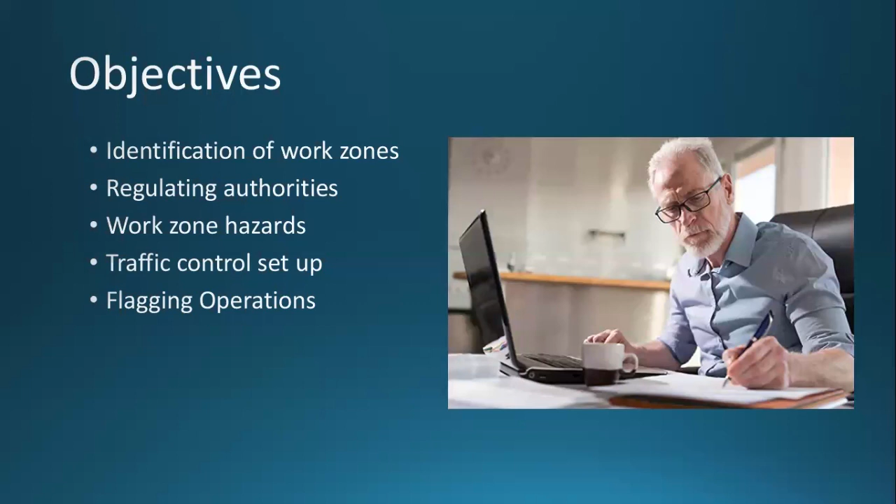The objectives of this course are to learn what a work zone is and how to identify one, to learn which regulating authorities provide standards and practices for work zone activities, as well as identifying some of the applicable standards, to learn some of the hazards associated with work zone activities and some recent statistics on work zone related incidents, to learn some of the basic operations of a temporary traffic control plan and how a work zone is set up, and to learn some of the operations around flagging, such as when it is used and what qualifications are required.

So what is a work zone? A work zone is defined as a temporary work site for maintenance of highways, road, and streets. Often work zones use cones, barrels, or barriers to guide traffic outside of the work site, such as what you would see on a major highway, but this is not always the case. Operations such as mowing, pothole repair, pavement striping, and snow plowing can use methods such as warning signs, shadow vehicles, and flashing lights.

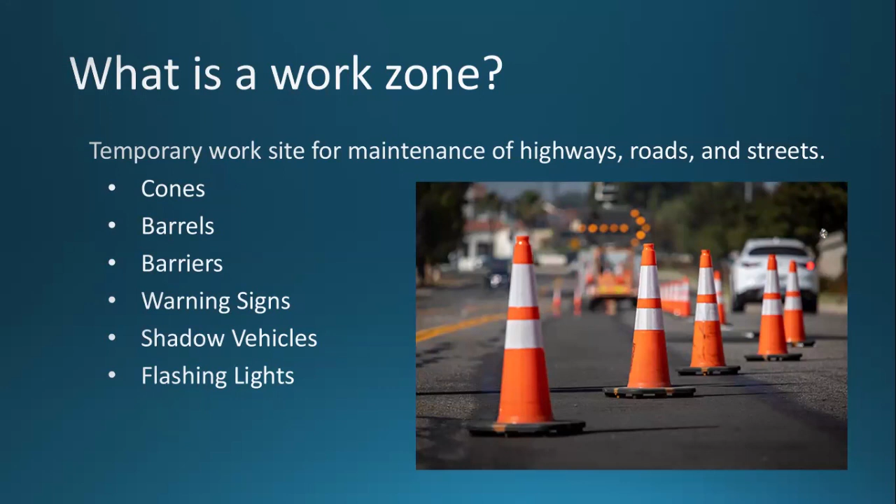The regulating authorities for work zones include the Occupational Safety and Health Administration and the Federal Highway Administration. The Federal Highway Administration created the Manual on Uniform Traffic Control Devices, MUTCD, which contains the national standards governing all traffic control devices.

Additional standards such as Kentucky Administrative Regulations and the Kentucky Revised Statutes are specific to Kentucky. Other standards incorporated by reference by OSHA include the American National Standards Institute, National Fire Protection Association, and the International Association of Fire Chiefs.

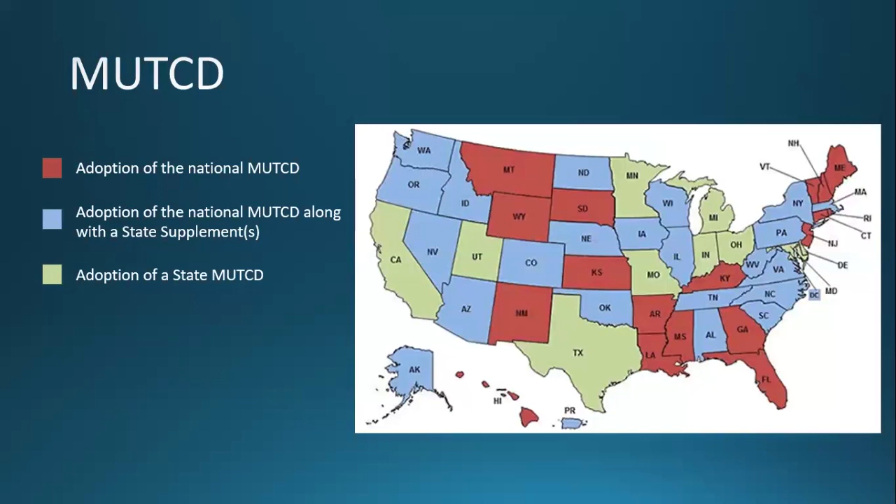Within the MUTCD, it is important to understand the format of the text. If the text mentions the word shall and is in bolded text, that section of the manual is a standard and is mandatory by law.

If it uses the word should and is italicized, then it is not required by law, but is strongly recommended. If the word may is used in regular text, then that section is providing information of an optional alternative. Lastly, everything listed in regular text not using the word may is additional information or supporting text.

The Occupational Safety and Health Administration covers very little on work zones. The MUTCD is referenced by OSHA in 29 CFR 1926 Subpart G, signs, signals, and barricades. It is also incorporated by reference within 29 CFR 1926.6.

The standards in this subpart cover the general requirements for accident prevention signs and tags, and the general requirements for flaggers or signal personnel. OSHA standards are not very specific on work zone requirements. Therefore, the MUTCD should be the primary resource used when determining regulations.

Other than the MUTCD and OSHA, there are Kentucky Revised Statutes and Kentucky Administrative Regulations, which are two bodies of state laws. Included in these are regulations that influence work zones, such as double fine areas, right-of-way to emergency vehicles and workers in a work zone, and others that help enforce driving cautiously through work zone areas. Further information can be accessed online through the state's database.

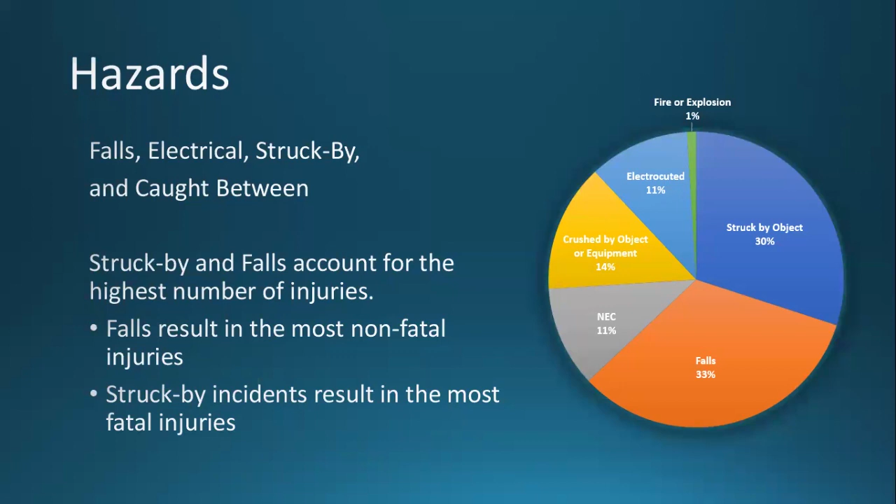Workers such as emergency responders, cleanup, utility, demolition, construction, and others in areas with moving vehicles and traffic are exposed to being struck by moving vehicles. Again, struck by incidents account for the highest number of work zone fatalities.

Moving construction equipment backing into workers, the public driving personal cars into someone, and falling objects are some of the most common struck by incidents. Common causes include confusing work zones, low visibility and poor weather conditions, lack of necessary signage, lack of warning time, and lack of proper training.

Proper training is the most important topic to prevent work zone related incidents.

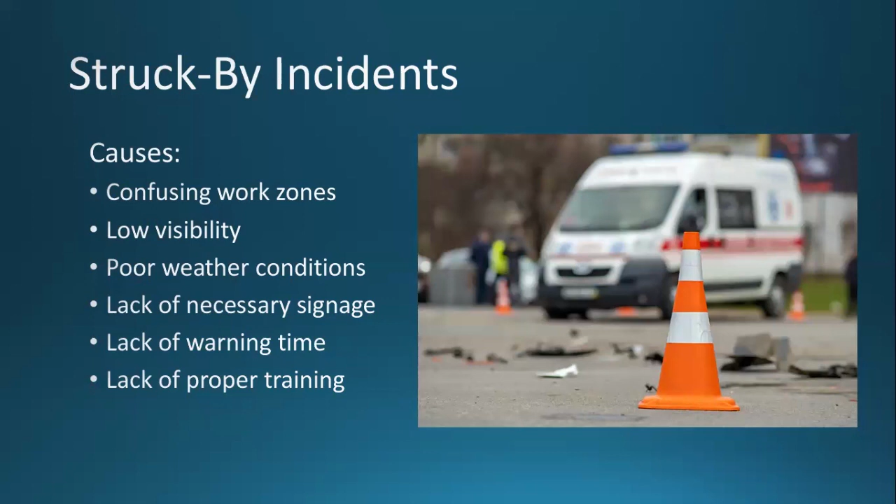Before work zone activities begin, these questions should be considered. Have you notified emergency service providers and public safety agencies? Have you determined how it will affect day-to-day activities? Have you determined how it will affect any civil events? Have you determined how it will affect school activities? Has public information been sent out regarding the upcoming road work? Have you reviewed crash history in the area? And lastly, have you surveyed the area to determine a best plan of action?

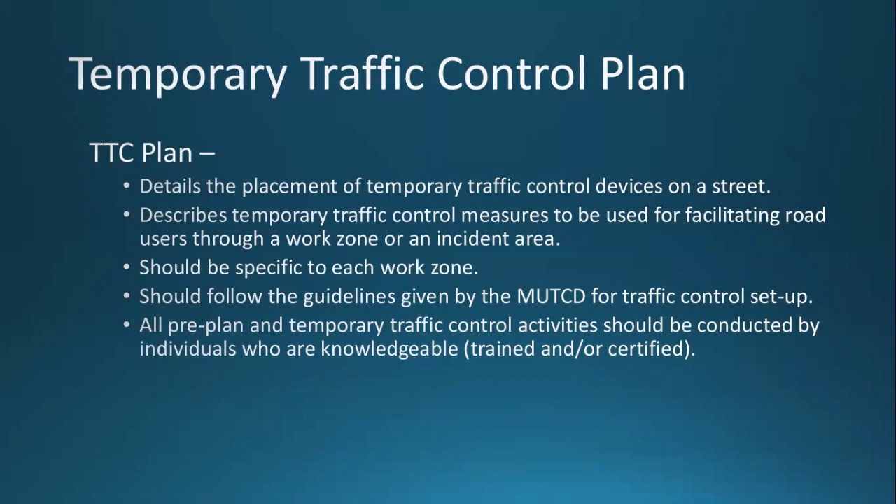After conducting the pre-plan activities, a temporary traffic control plan should be developed. A temporary traffic control plan is a document that details the placement of temporary traffic control devices on a street. These devices include signs, cones, barricades, temporary barriers, crash cushions, traffic drums, flashing arrow signs, electronic message signs, and more. The plan describes temporary traffic control measures to be used for facilitating drivers through a work zone or an incident area. These should be specific to each work zone and follow the guidelines given by the MUTCD for traffic control setup. All pre-planned and temporary traffic control activities should be conducted by individuals who are knowledgeable, for example, trained and/or certified in the principles of proper temporary traffic control.

After pre-plan activities and a temporary traffic control plan have been completed, you are ready to begin the setup of a temporary traffic control zone.

In section 6C.03 of the MUTCD, it defines the four basic areas of a temporary traffic control zone. Figure 6C-1 in the manual breaks down these four zones. Most temporary traffic control zones are divided into these four basic areas: the advance warning area, the transition area, the activity area, and the termination area.

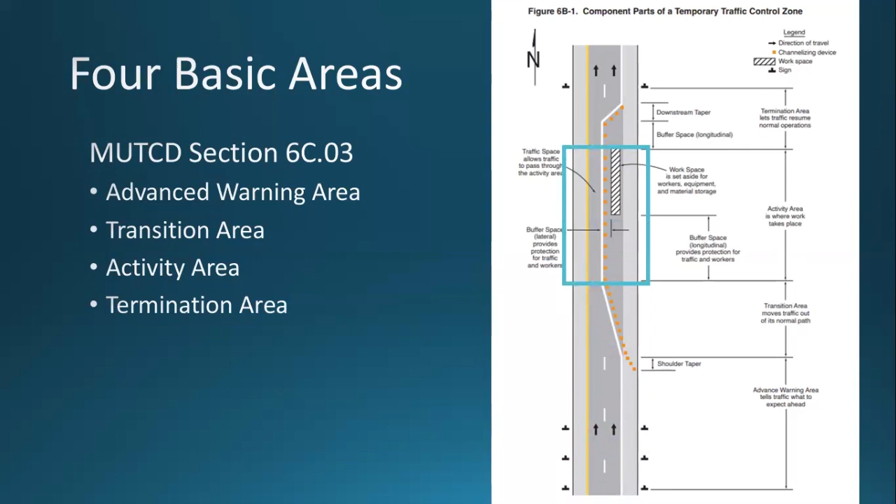Section 6B.04 of the MUTCD defines the advance warning area as a section of highway where road users are informed about the upcoming transition and activity areas or incident area. The advance warning area may vary from a single sign or high-intensity rotating, flashing, oscillating, or strobe lights on a vehicle to a series of signs in advance of the temporary traffic control zone activity area. Typically, an advance warning zone is a 3-sign series.

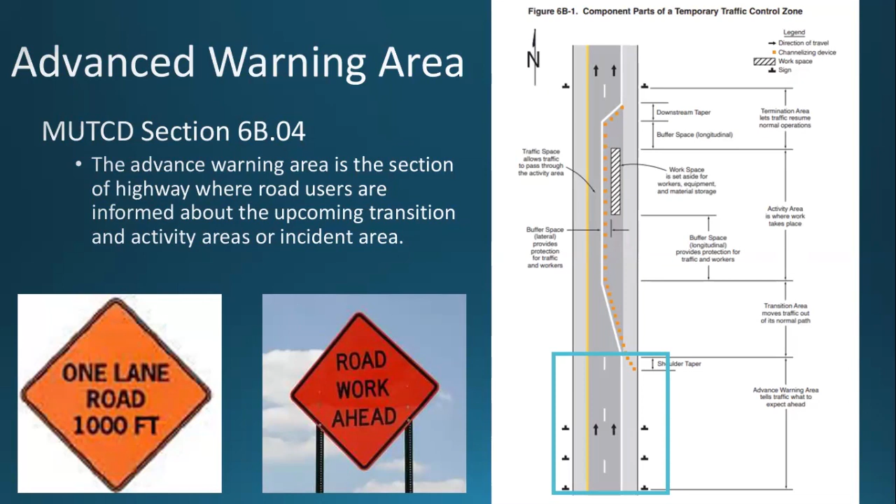On urban streets, the effective placement of the first warning sign in feet should range from 4 to 8 times the speed limit in miles per hour, with the high end of the range being used when speeds are relatively high. When a single advance warning sign is used in cases such as low-speed residential streets, the advance warning area can be as short as 100 feet. When 2 or more advance warning signs are used on higher speed streets, such as major arterials, the advance warning area should extend a greater distance.

Since rural highways are normally characterized by higher speeds, the effective placement of the warning sign in feet should be substantially longer, from 8 to 12 times the speed limit in miles per hour. Since 2 or more advance warning signs are normally used for these conditions, the advance warning area should extend 1,500 feet or more for open highway conditions.

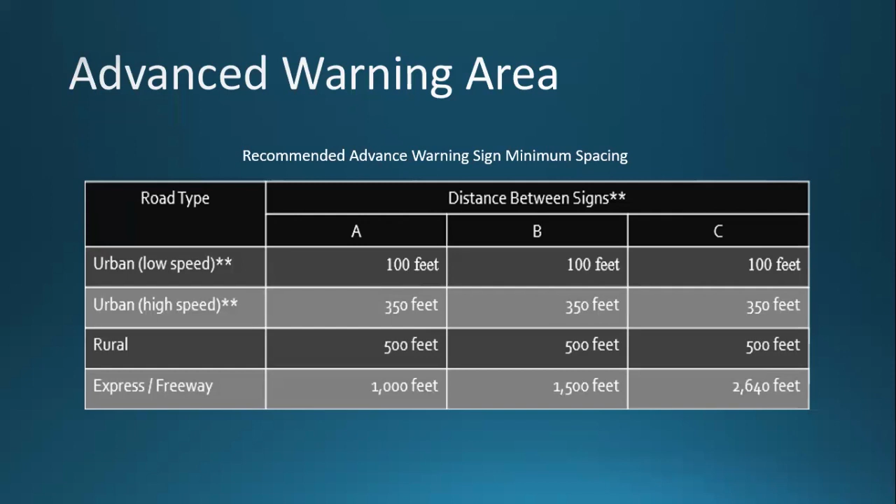Typical distances for placement of advance warning signs on freeways and expressways should be longer because drivers are conditioned to uninterrupted flow. Therefore, the advance warning sign placement should extend on these facilities as far as 1/2 mile or more.

Section 6B.05 of the MUTCD defines the transition area as the section of highway where road users are redirected out of their normal path. Transition areas usually involve strategic use of tapers, which, because of their importance, are discussed separately in detail. The standard for transition areas in this section of the MUTCD states that, except for mobile operations, when redirection of the road user's normal path is required, road users shall be directed from the normal path to a new path with appropriate channeling devices, traffic control devices, and/or TTC methods. Remember, if the text is bolded and uses the word shall, it is required by law.

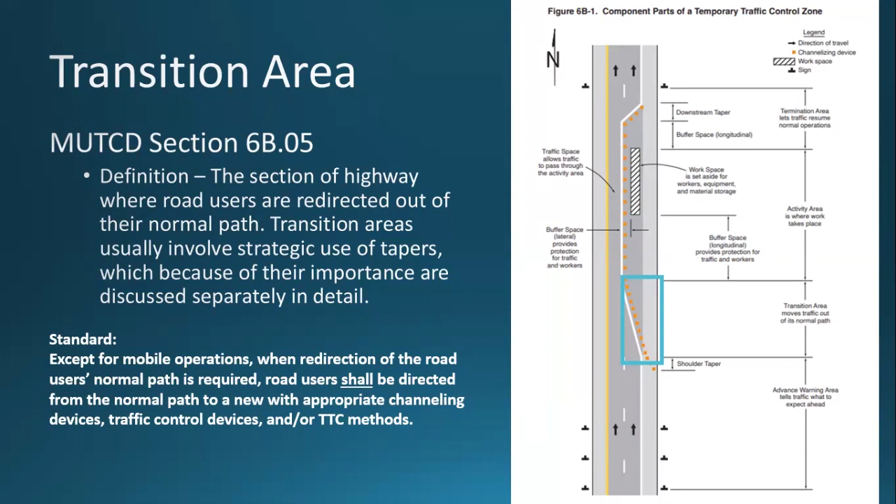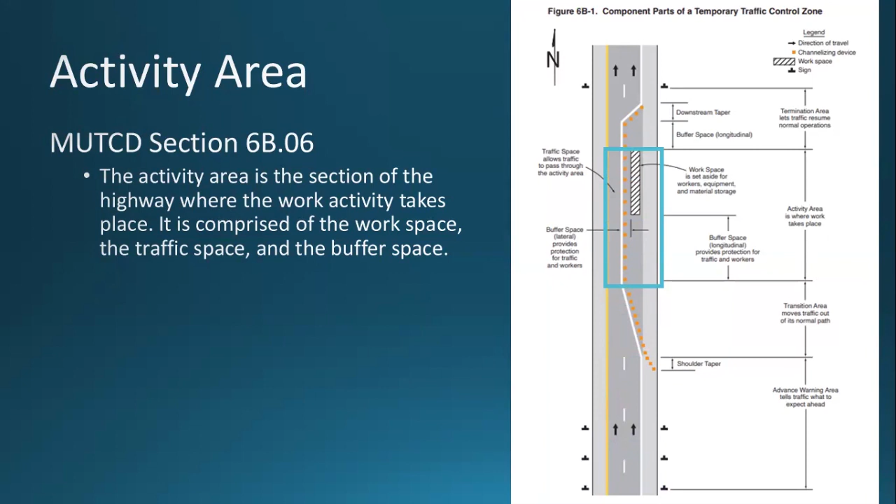Section 6B.06 defines the activity area as the section of highway where the work activity takes place. It is comprised of the workspace, the traffic space, and the buffer space. The workspace is the portion of the highway closed to road users and set aside for workers, equipment, and material, and a shadow vehicle if one is used upstream. Workspaces are usually delineated for road users by channelizing devices or to exclude vehicles and pedestrians by temporary barriers.

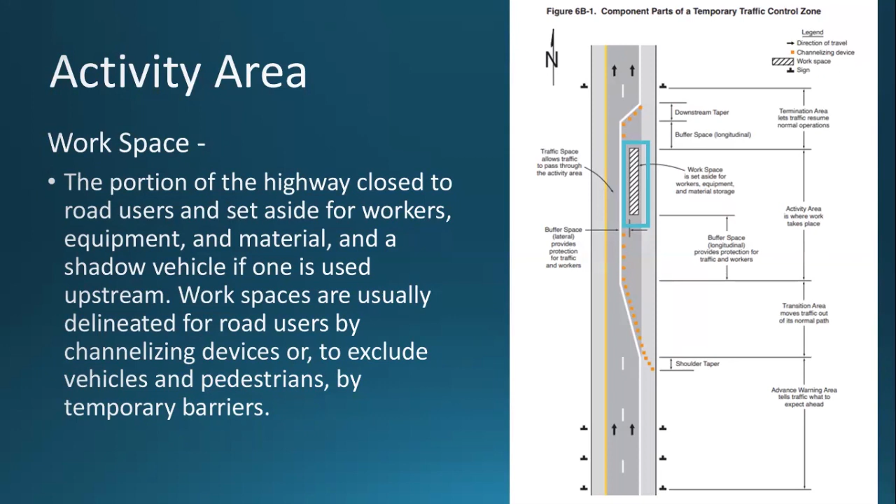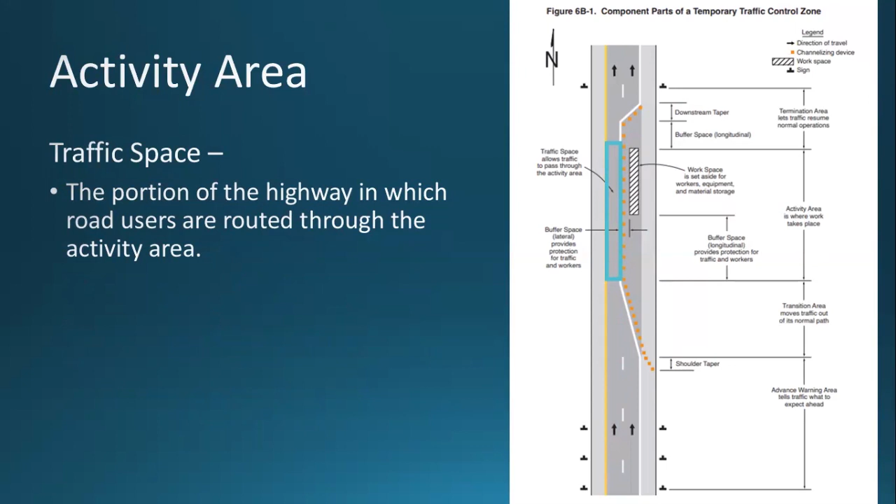The traffic space is the portion of the highway in which road users are routed through the activity area. The buffer space is the lateral and/or longitudinal area that separates road users' flow from the workspace or an unsafe area and might provide some recovery space for an errant vehicle.

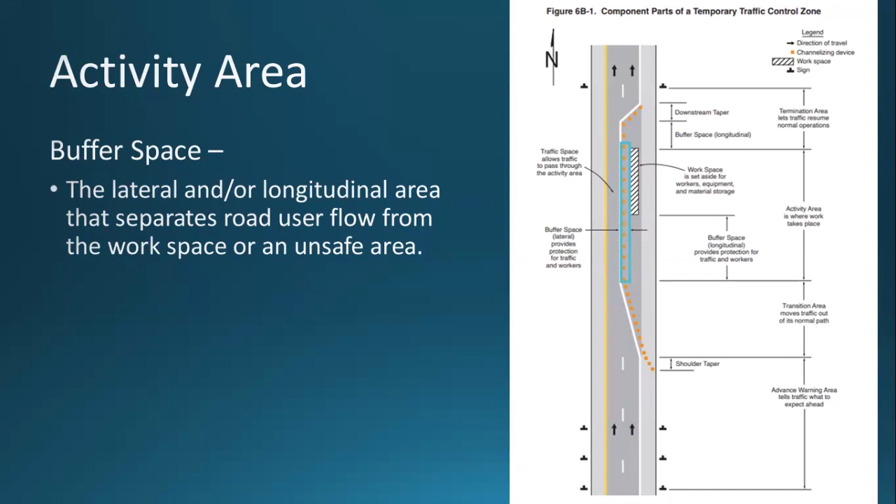The last area of a temporary traffic control zone is the termination area. Section 6B.07 of the MUTCD defines the termination area as the section of highway where road users are returned to their normal driving path. The termination area extends from the downstream end of the work area to the last TTC device, such as an end road work sign or a speed limit sign, informing road users that the speed limit has returned back to the typical speed of the roadway.

Typically, a longitudinal buffer space is used between the workspace and the beginning of the downstream taper to return traffic back to regular flow.

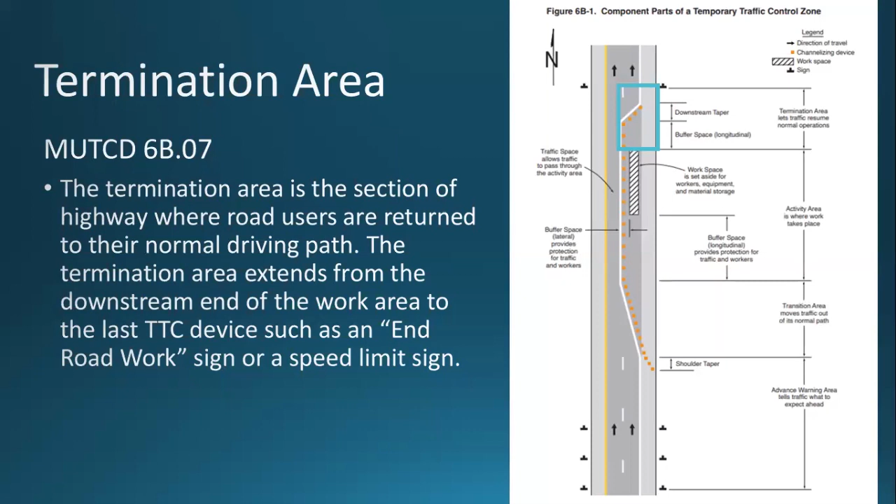Section 6B.08 of the MUTCD goes into detail on using tapers and the requirements. A taper is the area of a work zone where road users must adjust their path of travel. Tapers may be used in both the transition and the termination area. They are created by using a series of channeling devices and/or pavement markings to move traffic out of or into the normal path.

The length of the taper changes depending on the type of taper being used, the width of the transition area, and the posted speed limit.

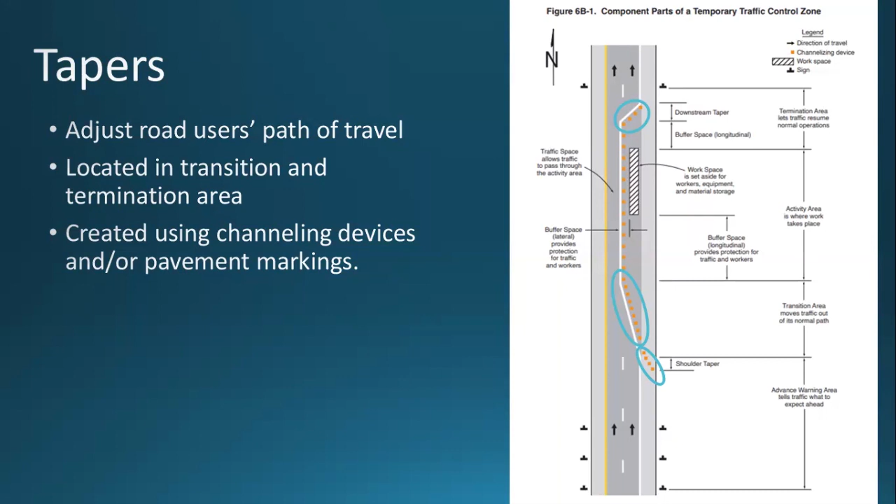Figure 6B2 in the MUTCD shows the different types of tapers. A merging taper requires the longest distance because drivers are required to merge into common road space. A merging taper should be long enough to enable merging drivers to have adequate advance warning and sufficient length to adjust their speeds and merge into an adjacent lane before the downstream end of the transition.

An example of a merging taper is when road work requires a 2-lane road to go to a 1-lane road, like what is shown in the figure.

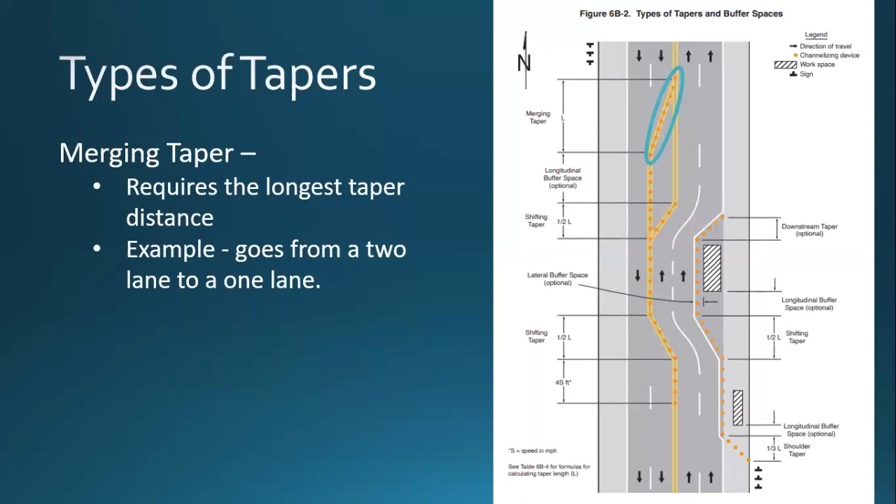A shifting taper is used when a lateral shift is needed. When more space is available, a longer than minimum taper distance can be beneficial. Changes in alignment can also be accomplished by using horizontal curves designed for normal highway speeds. This figure from the MUTCD shows a 2-lane shifting taper that reroutes traffic around the work zone.

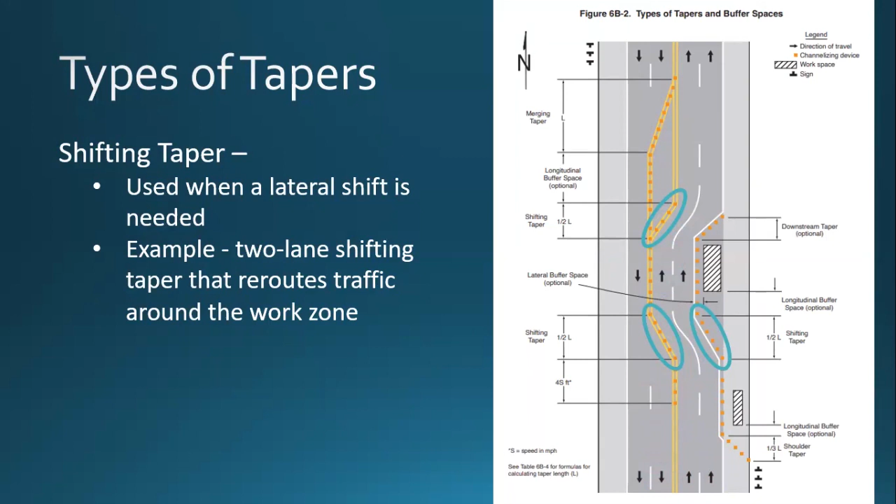A shoulder taper might be beneficial on a high-speed roadway where shoulders are part of the activity area and are closed, or when shoulders might be mistaken as a driving lane. In these instances, the same type but abbreviated closure procedures used on a normal portion of the roadway can be used.

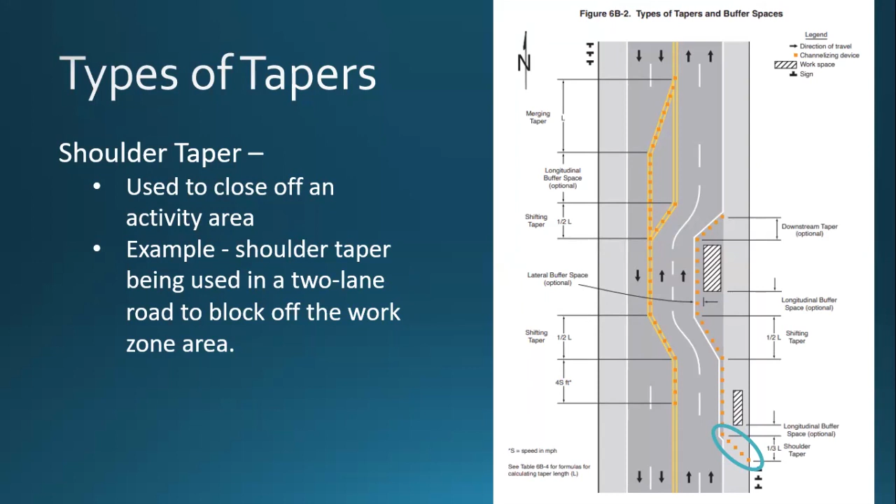However, if the shoulder is being used as a travel lane, either through practice or during temporary traffic control activities, a normal merging or shifting taper should be used instead. The example in the figure from the MUTCD shows a shoulder taper being used in a two-lane road to block off the work zone area.

A downstream taper might be useful in termination areas to provide a visual cue to drivers that access is available back into the original lane or path that was closed. This type of taper is optional. The example in the figure from the MUTCD shows a downstream taper being used in the termination area of a two-lane road.

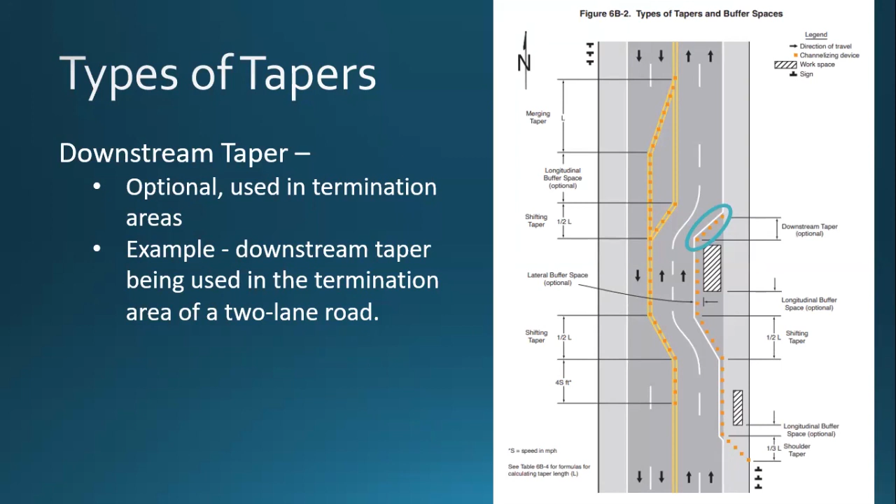This type of taper requires flaggers on both sides of the taper. The requirements for flagging will be talked about in a later slide due to the importance of this operation.

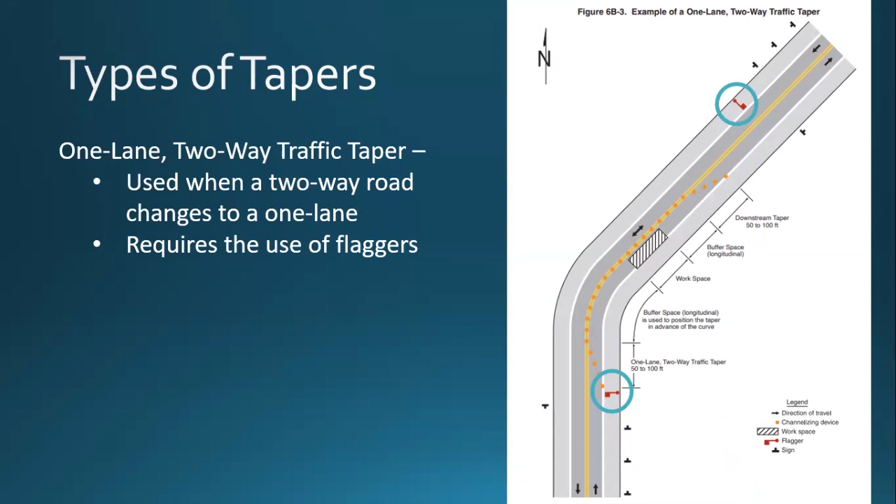In order to calculate taper length, Tables 6B3 and 6B4 from the MUTCD should be used. Using the formulas from Table 6B4, where W is the width of the offset of the taper in feet, and S is the posted speed limit, you can calculate L, or the length in feet of your taper.

For speed limits 40 miles per hour or less, multiply the width of the offset by the speed limit squared and divide that by 60 in order to get the necessary length in feet of the taper.

For speed limits 45 miles per hour or greater, multiply the width of the offset by the posted speed limit in order to get the necessary length in feet of the taper.

For merging tapers, they must be at least the length calculated using the necessary formula. For shifting tapers, they must be at least half the length calculated by using the necessary formula.

For shoulder tapers, they must be at least a third of the length calculated by using the necessary formula. Lastly, both downstream tapers and one-lane, two-way traffic tapers should be a minimum of 50 feet and a maximum of 100 feet long.

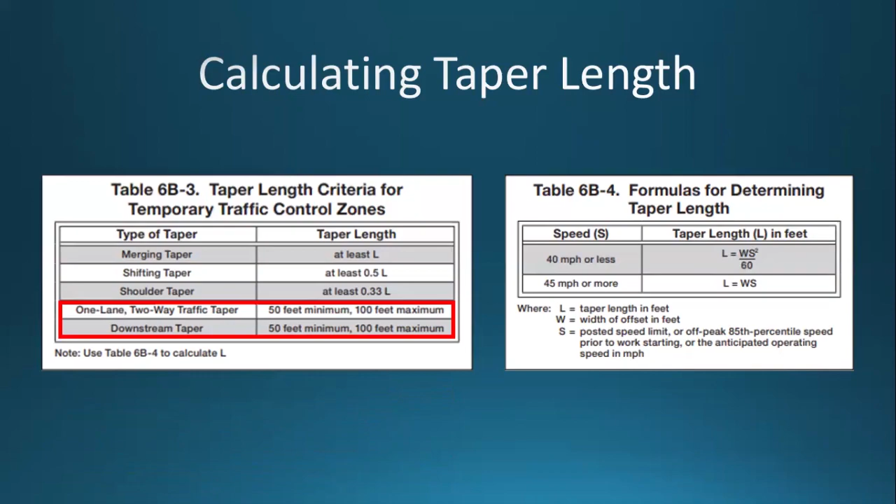The following example shows how to calculate taper length at speeds 45 miles per hour or greater.

Using the formula L equals W times S, where W, or the width of the lane, is 12 feet, and S, or the speed limit, is 65 miles per hour, you can solve for L, which is the length of the taper.

Multiply the width, 12 feet, by the speed limit, 65 miles per hour, which gives you a taper length of 780 feet.

For a merging taper, the length must be at least L, which is 780 feet. For a shifting taper, the length must be at least 0.5 or half of L, which is 390 feet.

And for a shoulder taper, the length must be at least 0.33, or a third of L, which is 257.4 feet. Note that if you are calculating the length of a shoulder taper, then W, or the width, will be the width in feet of the shoulder rather than the lane.

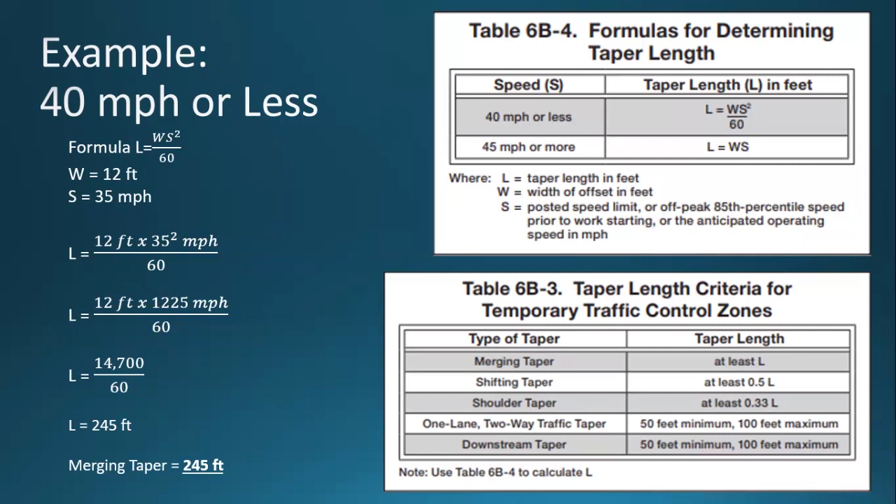This example shows how to calculate taper length at speed limits of 40 miles per hour or less. Using the formula L equals W times S squared divided by 60, where W, the width of the lane, is 12 feet, and S, the speed limit, is 35 miles per hour, you can solve for L, the length of the taper. First, using order of operations, square 35 miles per hour to get 1,225. Next, multiply 12 by 1,225 to get 14,700, and divide that by 60, which gives a taper length of 245 feet.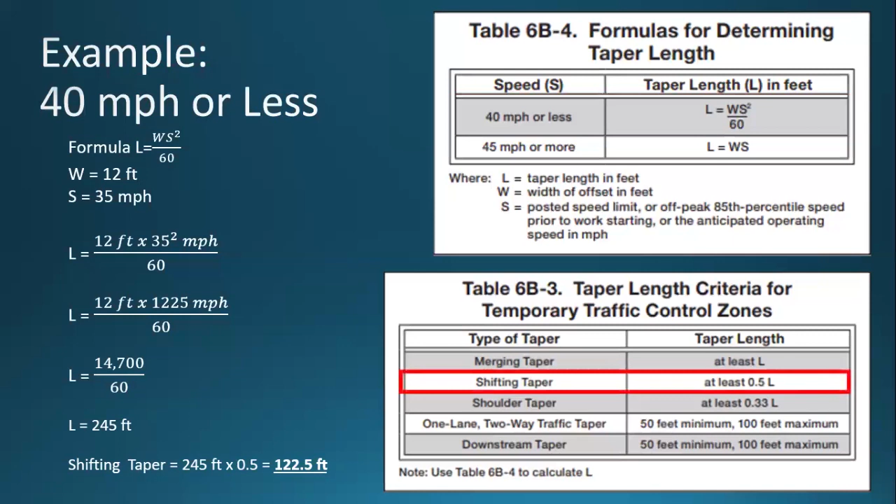Again, for a merging taper, the length must be at least L, which is 245 feet. For a shifting taper, the length must be at least 0.5, or half of L, which is 122.5 feet. And for a shoulder taper, the length must be at least 0.33, or a third of L, which is 80.85 feet.

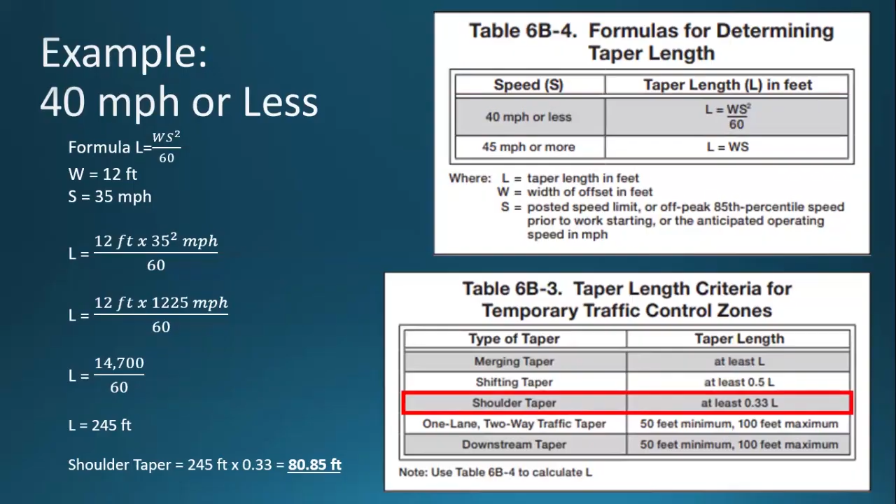Flagging is a work zone operation that requires the use of a flagger to direct traffic. A flagger is the safety professional that controls the flow of traffic. Most commonly, this is needed in one-lane, two-way roadwork activities or emergencies. When there is only one lane accessible to two-way traffic, a flagger should be used at both ends of the zone to coordinate traffic flow.

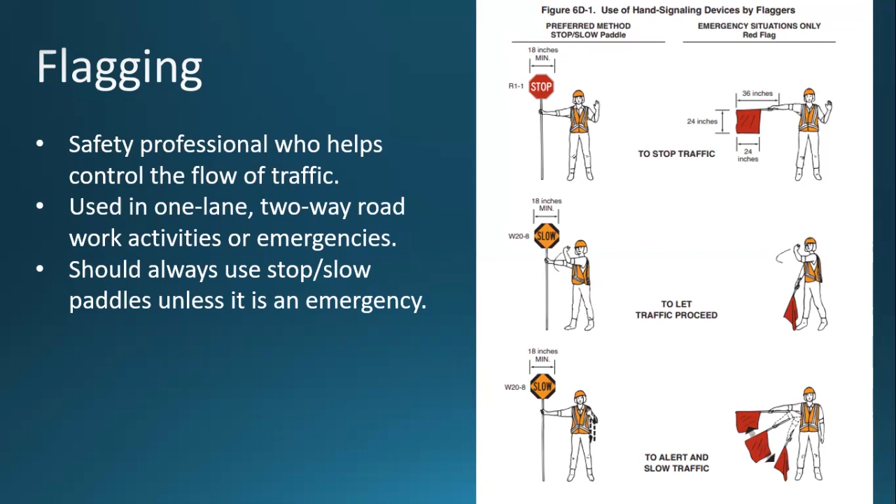The flagger should always use a stop-slow paddle unless one is not available in the event of an emergency where a flagger is needed. The MUTCD states that the stop-slow paddle shall have an octagonal shape on a rigid handle, and if used at night, shall be retroreflective.

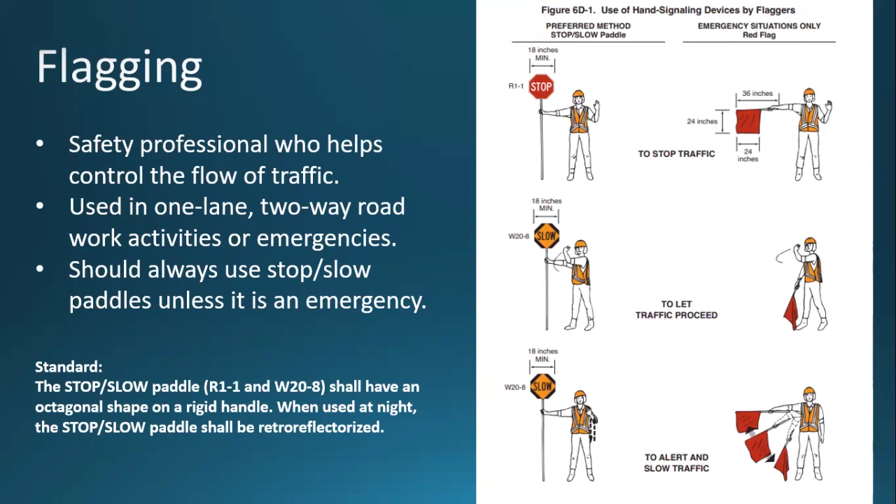OSHA mentions flagging operations in 29 CFR 1926.201A, which states signaling by flaggers and the use of flaggers, including warning garments worn by flaggers, shall conform to Part 6 of the MUTCD.

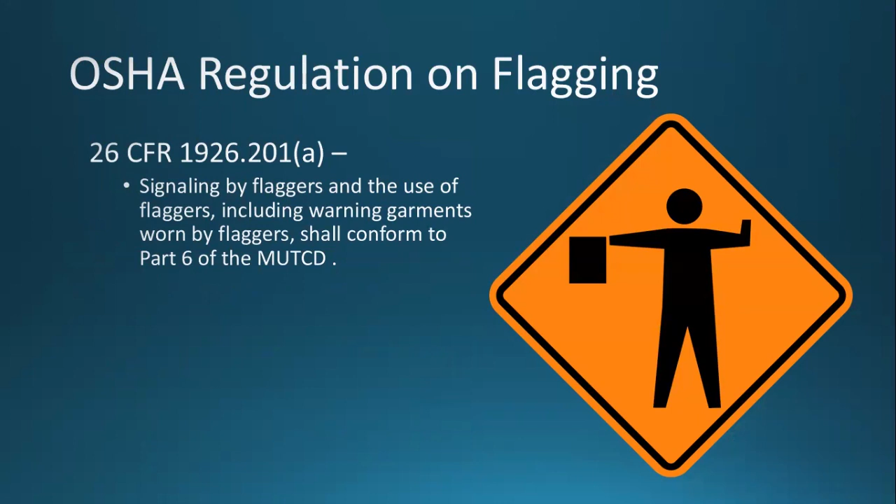Section 6E.01 of the MUTCD provides the necessary qualifications for flaggers. Because flaggers are responsible for public safety and make the greatest number of contacts with the public of all highway workers, they should be trained in proper traffic control practices and public contact techniques.

Flaggers should be able to demonstrate the following abilities: the ability to receive and communicate specific instructions clearly, firmly, and courteously; the ability to move and maneuver quickly in order to avoid danger from errant vehicles; the ability to control signaling devices such as paddles and flags in order to provide clear and positive guidance to drivers approaching a TTC zone in frequently changing situations; the ability to understand and apply proper traffic control practices, sometimes in stressful or emergency situations; and the ability to recognize dangerous traffic situations and warn workers in sufficient time to avoid injury.

It is important to remember that the employer is responsible for ensuring that any employee conducting flagging activities is trained. Flaggers should be used anytime road work on a two-way road only allows for one lane to be accessible, unless there is low traffic volume or temporary traffic control signals are in place.

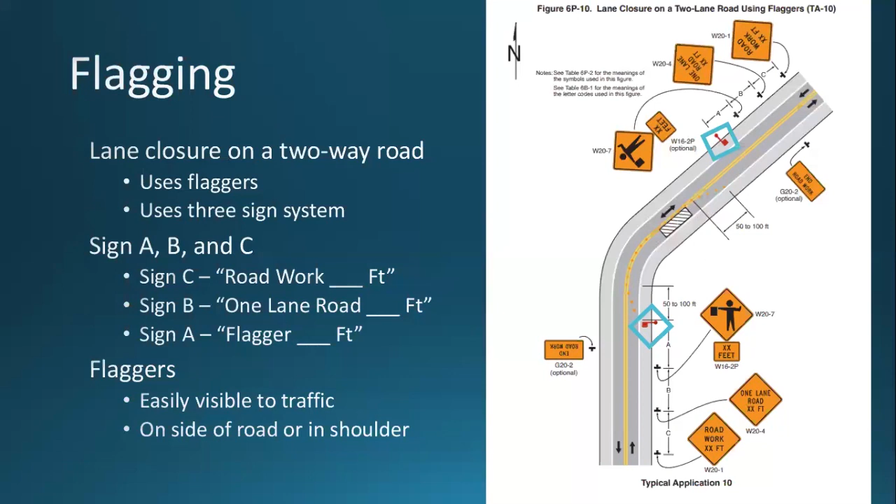All workers, including emergency responders within the right-of-way who are within the TTC zone, shall wear high visibility safety apparel that meets the Performance Class 2 or 3 requirements of the ANSI 107 2015 publication entitled American National Standard for High Visibility Safety Apparel and Headwear, or equivalent revisions. Class 3 is recommended for nighttime activities since it is the most reflective.

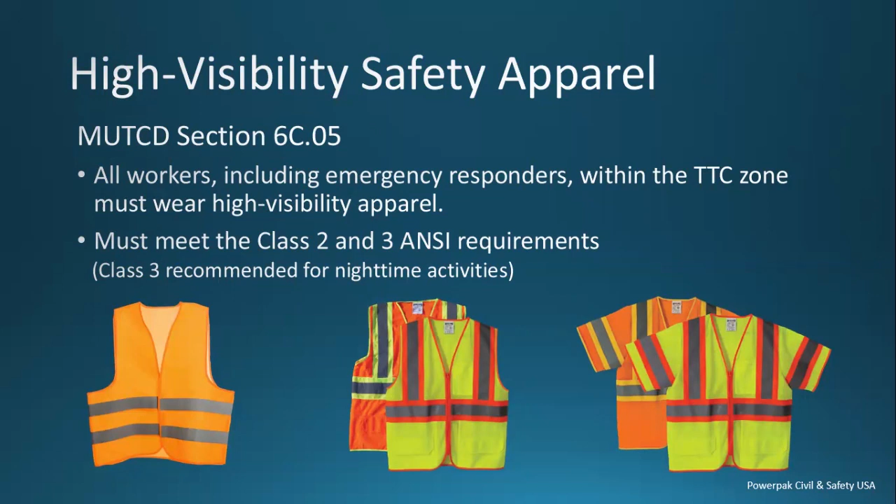Any firm, individual, or governmental agency that wants access to a road on the Kentucky State Highway System, or wants to conduct any type of work activity on the right-of-way, must obtain a permit from the Kentucky Transportation Cabinet. The policy and procedures for the following permits can be found in the Kentucky Transportation Cabinet Permits Manual: utility facility installations; permitting of entrances and other correlated roadway modifications; altering or replacing existing drainage facilities; plantings upon the right-of-way; replacement of right-of-way fence; tree trimming and cutting; use of roadside chemicals; airspace usage; geophysical surveys or investigations; treated sewage; locating facilities on the right-of-way; fairs, parades, festivals, banners, and welcome signs; school site agreements; recycler permits; and tourism signs.